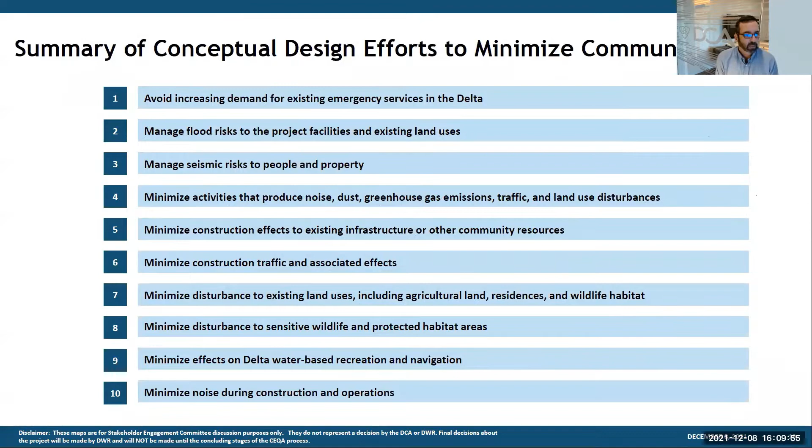Okay, next slide. So now we're going to go through these. I'm not going to bog down — these are in your packet and available for you to review on your own. But I do want to move through these and just highlight some key items among those 10 things.

First, in terms of avoiding increasing demands on existing emergency facilities or services in the Delta, we have included at the major facilities such as the intakes and the Southern Forebay, Bethany Complex, and all of the tunnel launch sites, emergency response facilities that would be dedicated to the program. At the same time, we're totally open to working with local emergency responders to see if we can move some of those facilities to their local locations so it could help increase the long-term emergency response capabilities beyond the period of construction. Next slide.

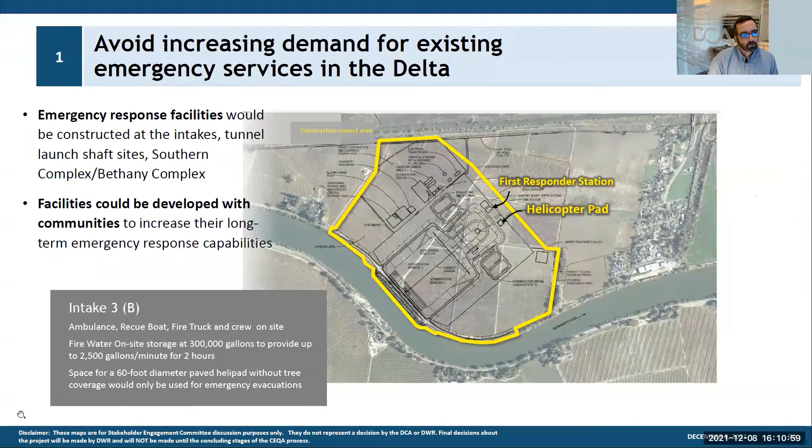In terms of managing flood risks to the project facilities and existing land uses, all of the conveyance facilities are being designed to the 200-year flood elevation, including future conditions of sea level rise and climate change. We performed a program-wide evaluation of flood risks and then developed structural and non-structural flood risk mitigations to address those.

Some very specific constraints we put on ourselves: we are avoiding the use of levee roads for heavy construction traffic, and we've also established setbacks for any fill placement so that any fill being placed as part of the project would be set back from the existing levees to avoid affecting their foundations. We have developed a construction sequence at the intakes that maintains the Sacramento River flood management criteria for the entire duration of construction.

For all of the southern facilities that would be part of DSOD, the California Division of Safety of Dams jurisdiction, all of those structures would be designed in compliance, and have been conceptually designed in compliance, with their requirements. Next slide, please.

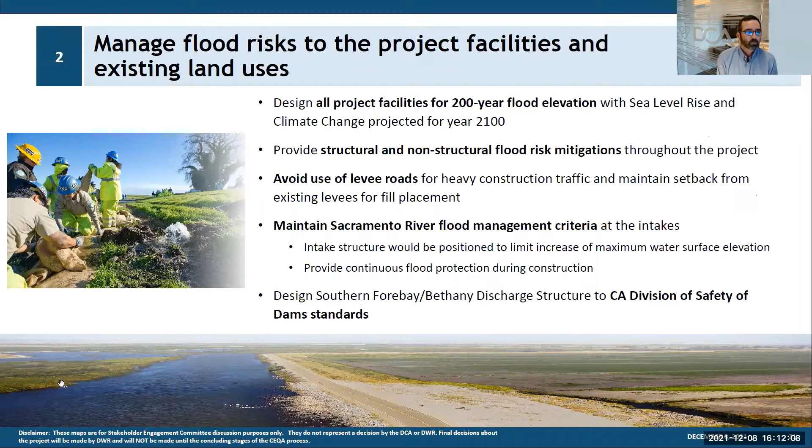To manage seismic risks to people and property, we first started out by developing and summarizing seismic design criteria for all the specialized features of the project. Then when we started our facility siting of all the features and facilities, we considered the presence of existing faults in the region, as well as soil conditions in general, which can affect the seismic response of the facilities.

Where it looked like it was needed, we've provided enhanced amounts of ground improvement. For instance, the intake foundations at the intakes, the Southern Forebay embankments, and any of the structures on soft or loose ground all have fully accounted for ground improvement. That's also in the quantities and estimates being evaluated in the EIR.

And then you're going to see this last one come up — it does affect a number of these different factors, but the use of tunnels to deliver water from the Southern Forebay to the approach channel for the Banks Pumping Plant is definitely more manageable from a seismic perspective. The alternative would have been a canal system, a surface structure, which would have been much more impactful and much more susceptible in this case to seismic shaking and movement. Next slide.

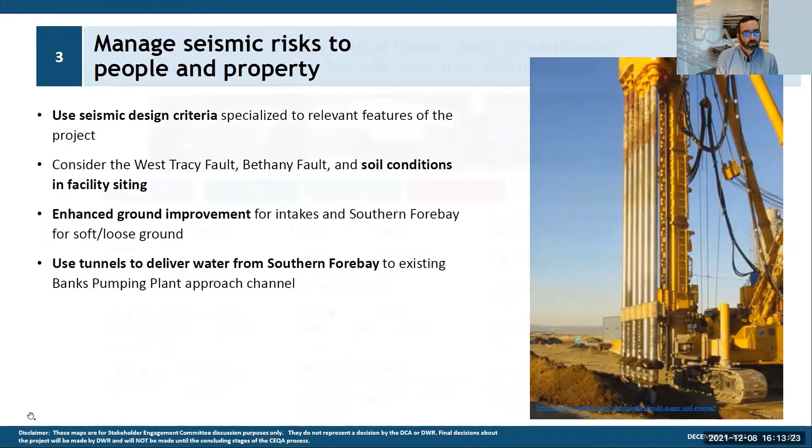In terms of minimizing activities that produce noise, dust, greenhouse gas emissions, traffic, and land use impacts, this is a pretty long list you can see here in these three columns. These are all actions taken in the conceptual design to address some of these issues. Some are very specific — for instance, the very first one, minimizing the use of impact pile driving at the intakes to really try and reduce noise.

Moving to the bottom of that same column, we moved the concrete batch plants away from the intakes over to a common location on Lambert, trying to get all of that activity away from the locations around the intakes. Some of these actions are more broad — at the bottom of the middle column, we developed a complete program-wide soil balance to minimize the amount of extra import or export of fill materials in and out of the project. We even used that exercise to optimize the sequence of construction so these materials would be available when the time was right, really minimizing the movements.

There's a whole slew of items listed here; I don't want to get too bogged down. One other big one you may not remember — on the very right column, early on we were able to eliminate the intermediate forebay entirely, which would have been a pretty large structure up in Glanville Tract that was part of the old project. Next slide.

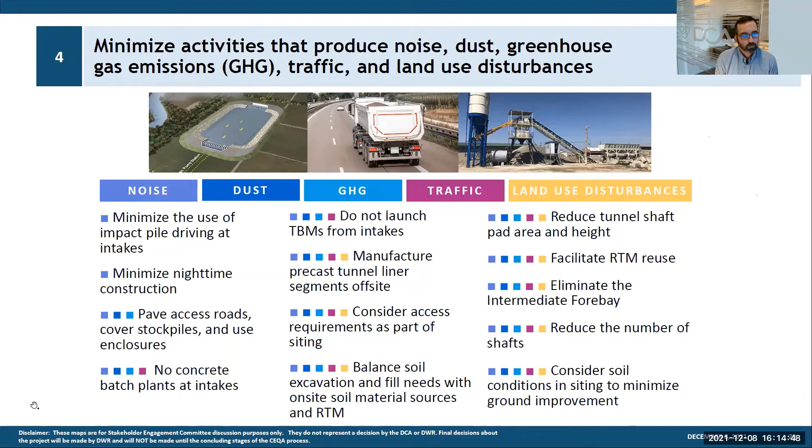In terms of minimizing construction effects to existing infrastructure and other community resources, the tunnel option from the southern forebay to the approach channel is a factor here. We also considered existing infrastructure during facility siting for all site elements. We used cutoff walls extensively to minimize effects on groundwater conditions during construction, committed to capturing, treating, and reusing water generated during construction activities, and maintaining existing irrigation and drainage systems surrounding the project sites.

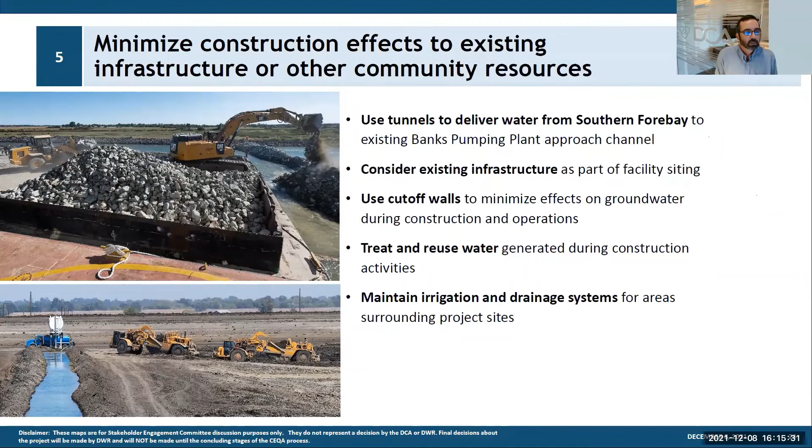Construction traffic and associated effects is another big one. We started with some big picture constraints, limiting routes used for construction traffic. Very limited traffic is allowed on State Route 160 and State Route 4, not heavy construction traffic. There's limited activity on Hood Franklin Road, restricted to buses shuttling people from the park and ride lot over to the intakes. Including park and ride lots at multiple locations along the project helps consolidate employee traffic and limit traffic associated with those facilities. We developed designated access routes and dedicated haul roads for each facility, using site-specific traffic studies to understand construction traffic impacts, and developed rail depots at bulk transport locations to get equipment and material off the roads.

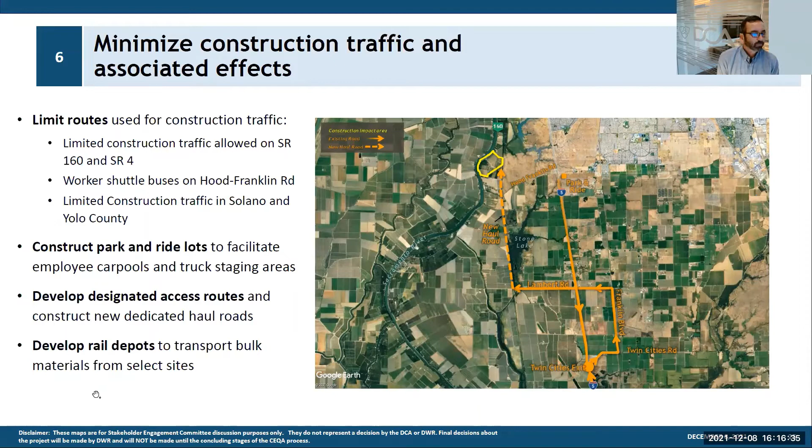To minimize disturbance to existing land uses, including ag land, residences, and wildlife habitat, the tunnel from the southern forebay to the approach channel minimizes surface effects, as you can imagine. The use of tee screens shrinks the site footprint up at the intakes, an innovation new to the project. We also considered all existing structures, the number of parcels, and nearby communities as part of the facility siting exercise. We've minimized nighttime construction activities, included plans for reclamation of agricultural land post-construction to get it back into productive use, and committed to maintaining irrigation and drainage systems for areas surrounding construction sites.

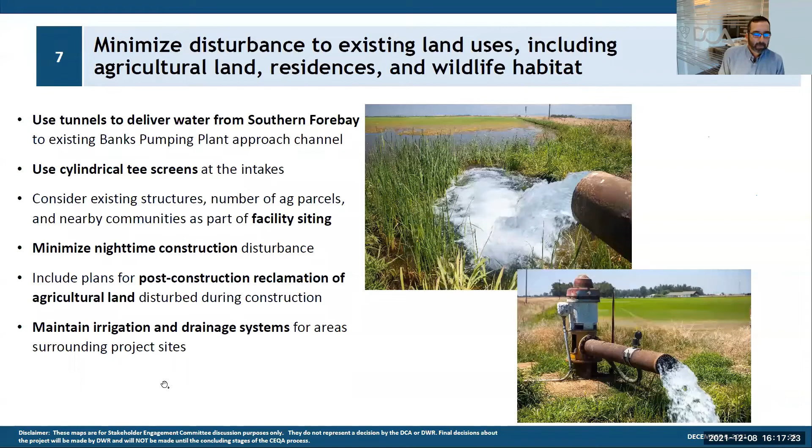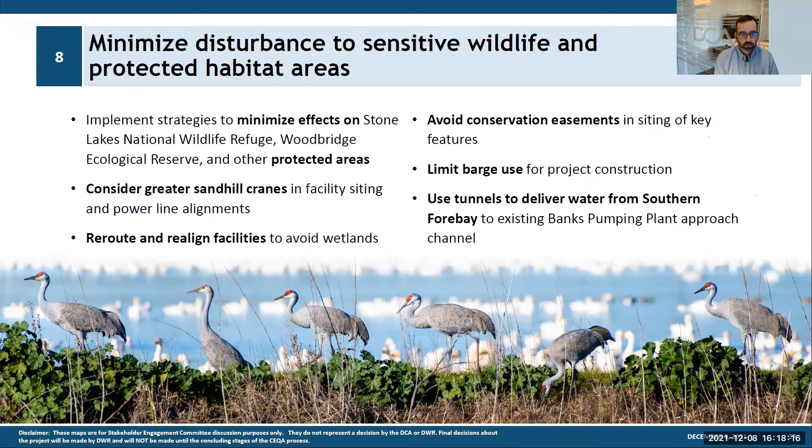In terms of minimizing disturbance to sensitive wildlife and protected habitats, we had several strategies to minimize effects on protected areas such as Stone Lakes and Woodbridge. We shifted facilities, moved shafts, and changed locations to get them out of flyways or sensitive zones. We considered greater sandhill cranes specifically in siting facilities and laying out power line alignments, eliminating a tremendous amount of new overhead power line through the design team's efforts. We rerouted and realigned facilities to avoid wetlands and conservation easements, and limited barge use across the project to avoid effects on sensitive habitats. The tunnel connection from the forebay to the approach channel has similar effects on surface habitat.

Turning to navigation, minimizing effects on Delta water-based recreation and navigation. Barge use is limited mainly to construction activities at the intakes, as Phil described, just for excavation of soil and placement of riprap. There are no barge landings in the program. Originally a barge landing was considered for Bouldin Island and also Lower Roberts Island, but none are included now. We reconfigured the Lower Roberts Island shaft site to shift away from Windmill Cove Marina, and the renders we prepared for the RTM stockpiles show them tucked next to existing dredge spoil stockpiles, set to a height limit that doesn't extend above the adjacent fill or surrounding levees.